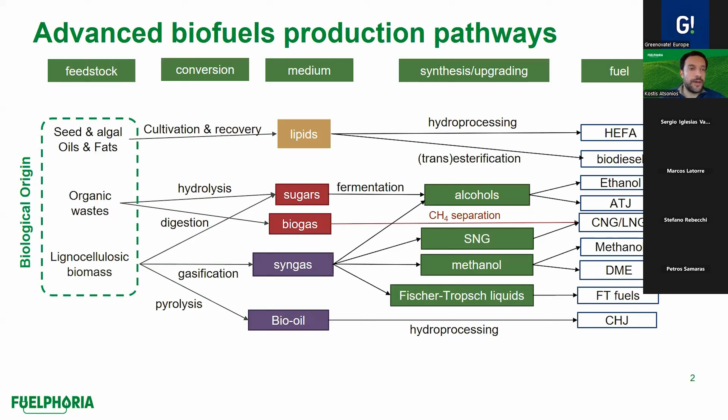So there has been a lot of effort paid towards the optimization of specific steps at the process level, but there is still a lot of effort needed in order to foster this market uptake and to bring these technologies into commercialization.

The most important thing is to examine and demonstrate the overall value chains, not only focusing on explicit process steps. That is the contribution of our project.

Fuelphoria, apart from demonstrating a robust and efficient technological solution for the production of advanced biofuels and renewable fuels of non-biological origin, aims to build a portfolio of sustainable and secure value chains for this production, not focusing on a specific part of the process, but covering entire value chains from feedstock supply to the end use of the produced fuels.

It also aims to promote the exploitation of green fuels, by identifying the barriers that should be overcome in value chains, not only in Europe but also in Africa, to provide new policy recommendations at European level, and to develop new business and marketing concepts in Europe and Africa.

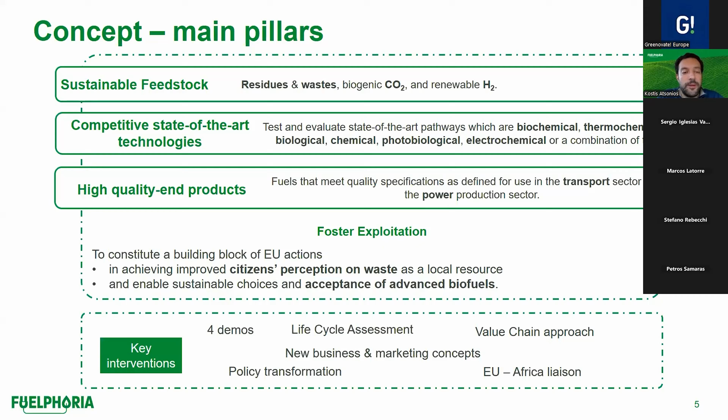And the high quality of the end product, in order to meet the specifications for use in the transport and power sector. All of this is framed under certain exploitation methodologies that aim to constitute a building block of European actions in achieving improved citizens' perception of waste as a local resource, and to enable sustainable choices and acceptance of these renewable fuels.

The heart of this project is the 4 demos. I'm going to give a very brief overview before the more detailed presentations that will follow.

Starting from Demo 1, located in Belgium at the wastewater treatment plant owned by Aquafin in Antwerp. This demo aims at the production of microbial oil, or triglycerides, using as feedstock biogenic CO2 coming from the biogas upgrading unit.

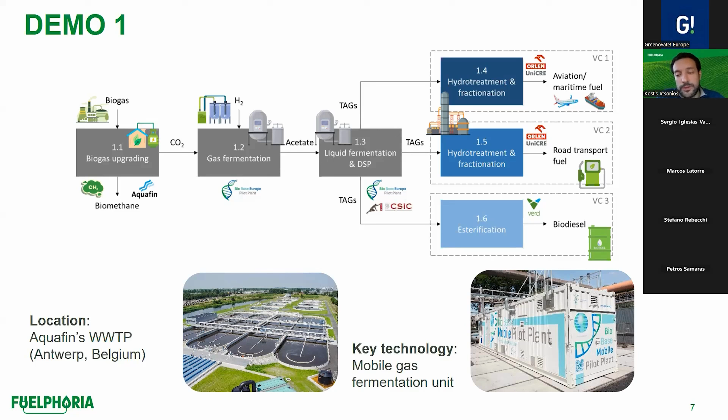CO2 is converted into lipids through a two-stage biological conversion via fermentation. Depending on the linked value chains, these lipids are upgraded into fuels that can be used for the transport sector, like aviation, maritime, road transport for heavy trucks, and biodiesel as well. Among the different technologies, the most important is the mobile gas fermentation unit.

The second demo is located in Spain. Here we also use biogenic CO2, but in this case it comes from a winery, from grape fermentation at Viñas del Vero winery, located in Somontano, Spain, together with green hydrogen coming from water electrolysis.

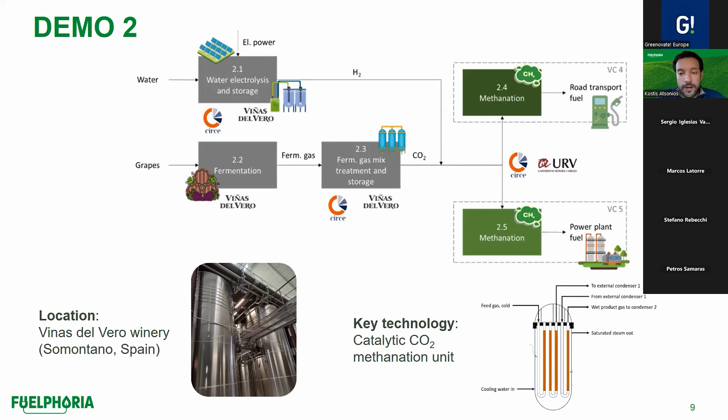CO2 is converted into green methane that can be used either as a road transport fuel or as fuel for electricity generation. Here, the key technology is the novel catalytic methanation unit developed by the demo two partners.

The third demo is located in Greece. Here, the main aim is to produce biodiesel using algal oil that is harvested and extracted using as primary feedstock digestate and CO2 from a biogas plant located in Lagadas, Thessaloniki.

The algal oil produced is converted into biodiesel through esterification, which can be used either as a transport fuel or as fuel at island energy systems.

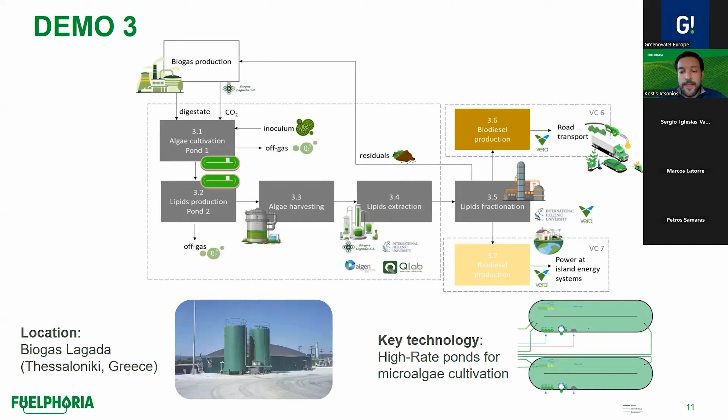The fourth demo is the second one also located in Spain. Here, a zero waste approach is used for the valorization of a great variety of different urban bio-wastes towards the production of bioethanol, using an advanced simultaneous saccharification and fermentation process.

The effluents from this bioethanol production process, both liquid and solid waste streams, are used for the production of biogas and digestate, whereas the CO2 from the fermentation process is hydrogenated towards the production of ethanol and methanol, which have applications in road transport.

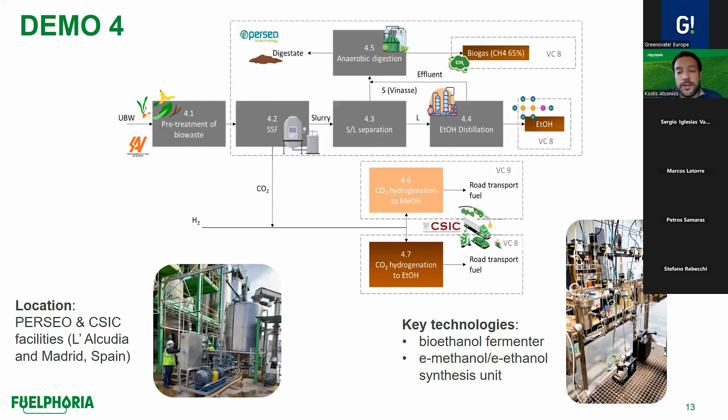Here we have two different sub-demos. The first is located in L'Alcudia, next to Valencia, owned by Perseo, and the second at CSIC facilities in Madrid. The key technologies here are the bioethanol fermenter and the pilot catalytic reactor for synthetic ethanol and methanol production.

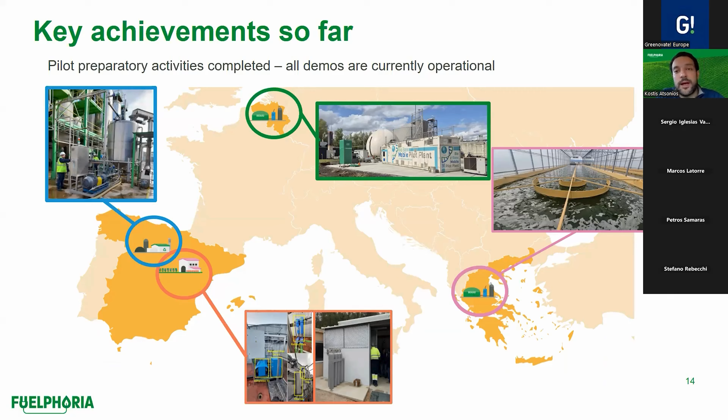Now we are in the first months of the third year of the project. I'm happy to say that all the preparatory activities for these pilots have been completed, and all the demos are currently operational, now producing their first results.

And the other key achievement so far is the optimization of these technologies that are enabled in these 4 demos. Since in Fuelphoria there is a portfolio of different competitive technologies, we have biochemical, biological, thermochemical, photobiological conversion technologies. These have already been optimized and tested at lab scale, and now they are upscaling.

I don't want to talk more. You'll hear more interesting information from the demo leaders at the technical presentations that follow. So that's all from my side.

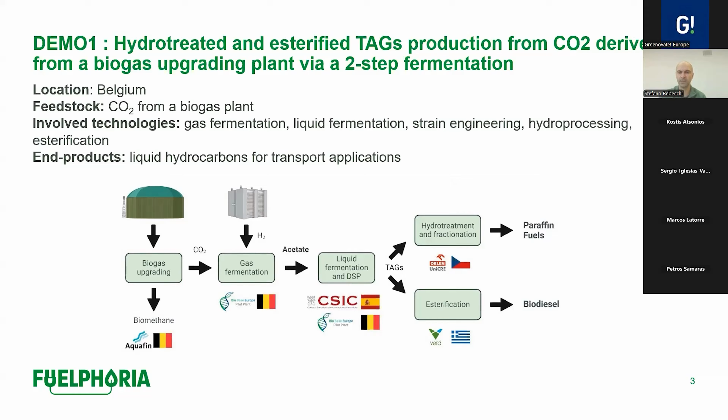Many partners are involved. Among them, we have Aquafin, a wastewater treatment company based in Flanders, Bio Base Europe pilot plant, CSIC, Orlen, UniCRE, and Verd.

So what about the concept of the demo? The demo is divided into different steps, and the main categories are the biological processes and catalytic processes. Initially, the biogas is sent to a biogas upgrading plant where biomethane and CO2 are separated. The first main step of the demo is the gas fermentation process where the biogenic CO2 is converted into acetate. The second biological step is the conversion of the bioacetate into TAGs, microbial oils - this is the liquid fermentation.

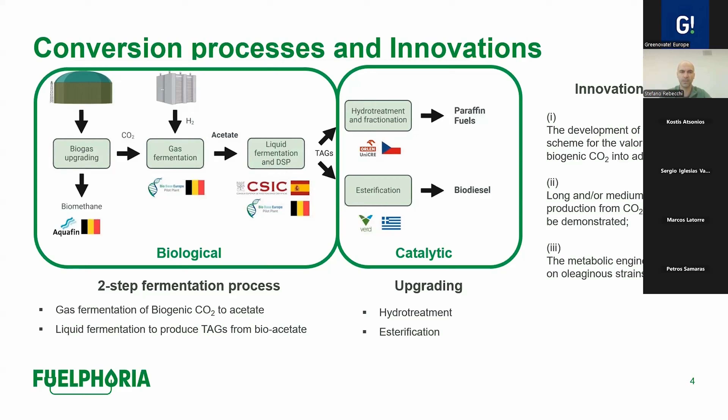Then the TAGs, the microbial oils, are converted into paraffin fuels or biodiesel via a catalytic way. The main innovations of the demo are the development of an integrated scheme for the valorisation of biogenic CO2 into biofuels, and the production of medium and long chain TAGs from biogenic CO2. There are also metabolic engineering strategies for the microorganism needed for the production of the TAGs. We have already passed the second year of the project, and we have already achieved many results for the optimization of the different steps.

In this slide and the next few slides, I will show the main results of the lab scale optimization, starting with the optimization of the gas substrate fermentation process. The objective was to use a wild type anaerobic acetogenic bacteria and develop a continuous fermentation process at lab scale, and to maximize the productivity and concentration of acetic acid.

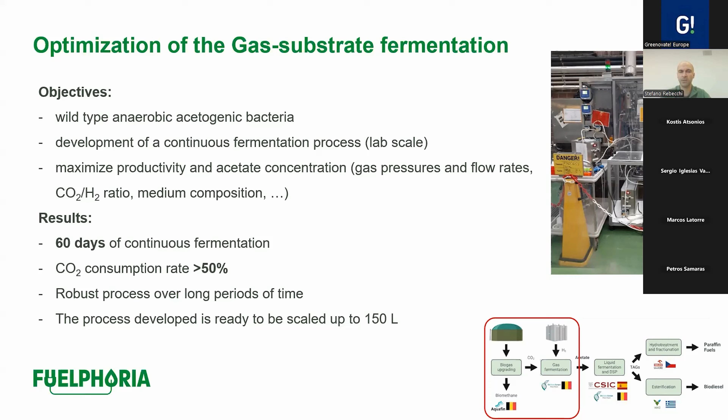The main results: we were able to ferment continuously for more than 60 days, and we reached a consumption of CO2 higher than 50%. So the process is actually robust also for a long period, and we are ready - and actually already doing it, I will show you later - for the scale-up of the process at 150 liter scale and in real industrial conditions.

For the development of the oleaginous strain for TAG production, the partner involved is CSIC CIB, and the main objectives of this task were to use lipid strains like bacteria, Rhodococcus, and yeast - modifying those microorganisms genetically in order to improve the production of lipids by increasing the transport and flux of carbon from acetate to TAGs.

CSIC already worked on both microorganisms, and in particular they were able to produce 3 Yarrowia strains, noticing an increased consumption of acetate and production of TAGs. They also worked on the genetic modification of Rhodococcus jostii, and particularly already tested different acetate concentrations in fed batch mode at small scale.

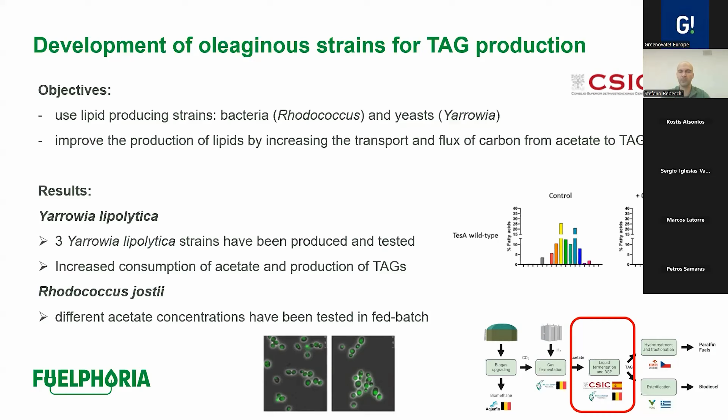Now we move to the next step: optimization of the fermentation process for the production of microbial oils. This task is led by Bio Base Europe pilot plant. The main objective was to use an optimized strain from the previous step for the production of TAGs, maximize titer and productivity by fine-tuning fermentation parameters, and optimize the recovery and purification of the microbial oil from the fermentation broth.

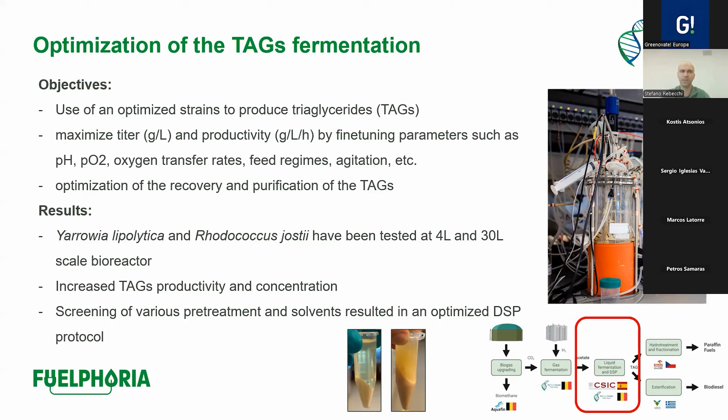We already tested both microorganisms, Yarrowia and Rhodococcus, at different scales, 4 liter and 30 liter bioreactor scale, and noticed increased oil productivity and concentration. We also screened different pretreatment methods and solvents for recovery of the microbial oil, and optimized our DSP protocol. So for the TAGs, we are already ready for the scale-up during the next 2 years.

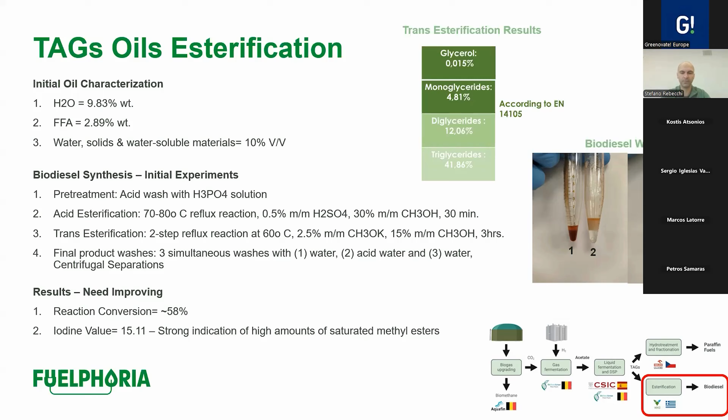We already sent some of the microbial oil to the partner involved in the esterification of the TAGs. I won't go deeply into this slide, but these are the main results at lab scale on a small amount of microbial oil. The partner reached a reaction conversion of approximately 58%. A lot of effort still has to be put into upgrading the oils.

Now I will move to the upscale and challenges we are facing for the scale-up of the demo at a bigger scale. I want to give a quick overview of what we will do, which is the scale-up of each step of the demo.

First, I'll start with the scale-up of the gas fermentation part. We will scale it up to 150 liter scale using real biogenic CO2. Then for the production of microbial oils, we will scale up to a bigger scale, aiming to produce hundreds of kilograms of microbial oil. And the hydroprocessing and esterification of the TAGs for biofuel production will also be scaled up.

So I will start with the scale-up of the gas fermentation unit. This is the general concept. What we already did, and I'll show in the next slide, is first connect the biogas plant and the upgrading plant with our mobile gas fermentation unit.

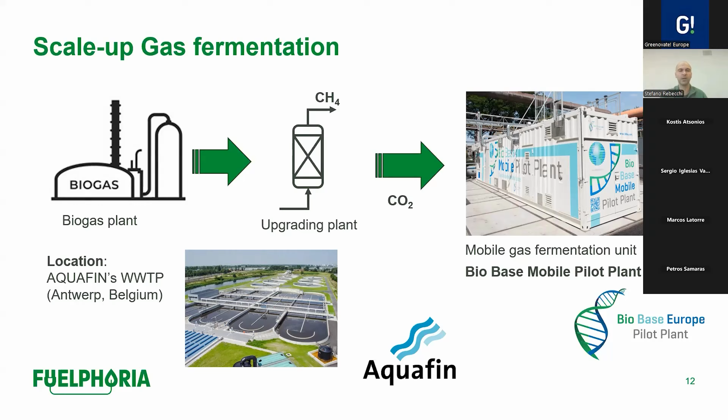The location is a partner of the project, Aquafin, a wastewater treatment company, and at one of their sites they have a biogas plant. The aim was to connect the gas fermentation plant to the upgrading plant.

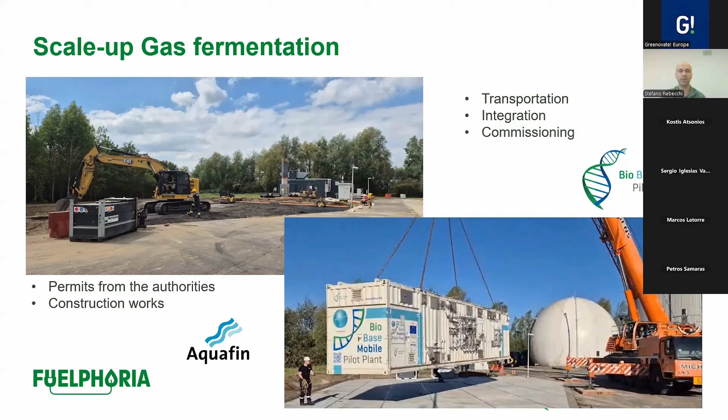This happened a couple of months ago, end of September this year. We faced a lot of challenges, for example permits from authorities, construction works, transportation, and integration and commissioning of our system at the Aquafin site. We were able to finish the commissioning last October this year, and as you can see from this picture, the biogas plant, the upgrading plant, and the mobile gas fermentation unit are now connected.

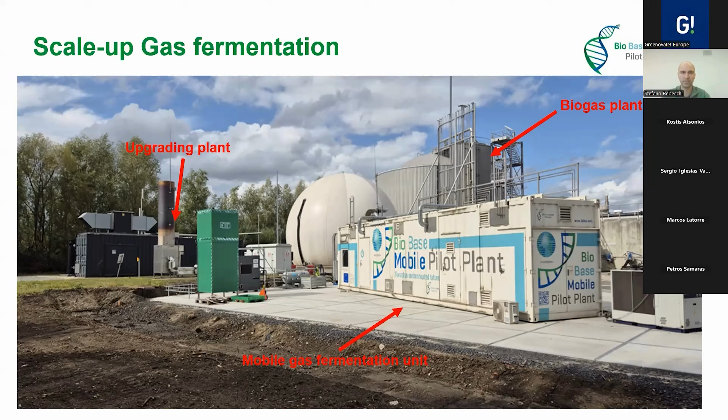We are currently running the first tests using the real biogenic CO2 coming from the biogas upgrading plant. I don't have data to show now because the process is currently ongoing, but we have some promising results.

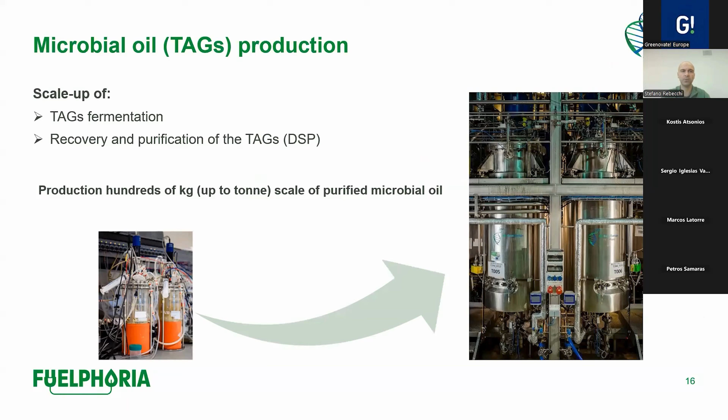Now I'll move quickly to future activities, because next year we will scale up microbial oil production. We will scale up the TAG fermentation to 15 cube scale, and also scale up the recovery and purification DSP. The last step is the upgrading of the microbial oil for production of biofuels, which will be done in two ways: hydrotreatment and esterification.

Hydrotreatment will be done by our partner Orlen Unicre, and esterification by our Greek partner Verd. There are many challenges, for example selection of the catalyst, and seeing if commercial catalysts are suitable for the oil produced in Fuelphoria in this demo. For esterification there are also challenges and a lot to improve, like the conversion. This process will be scaled up to 250 liter scale.

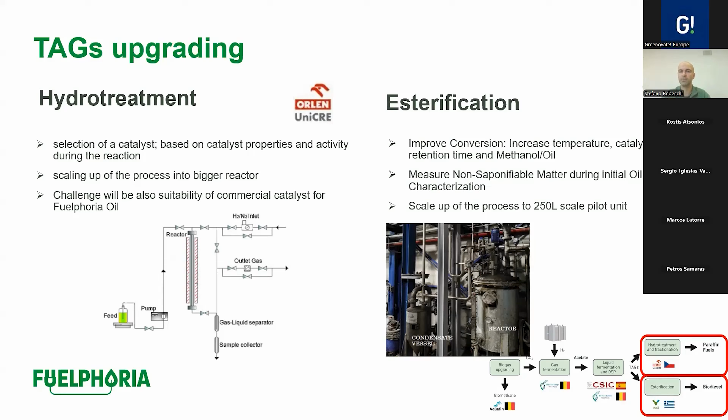Thank you very much. This is all from my side.

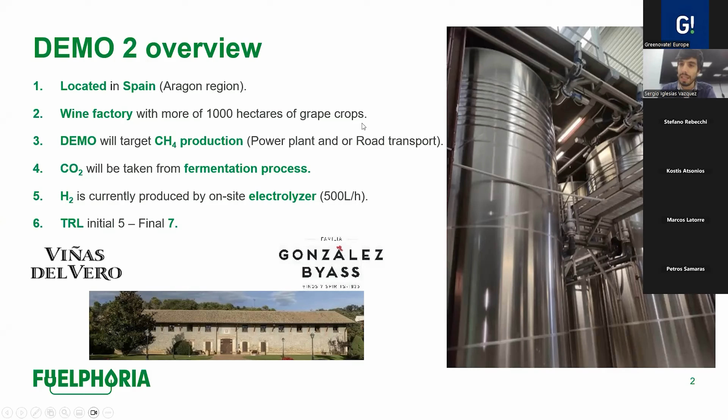Demo 2 is located at Viñas del Vero, Spain, a wine factory with more than 1,000 hectares of grape crops. The demo will target methane production, with CO2 taken from the fermentation process of the wine procedure. Hydrogen is currently produced by an on-site electrolyzer with a capacity of 500 liters per hour. The initial TRL of the project is 5, with a final scope of 7.

The aim of Demo 2 is to utilize the captured CO2 from wine fermentation combined with green hydrogen as feedstock for a methanation process via the Sabatier reaction. This is achieved using a novel nickel-based catalyst, and the CO2 will be separated, purified from the fermentation gas, and stored for later use, where it will be converted into methane. The CO2 generated during wine fermentation is carbon neutral, matching the amount absorbed by the vines through photosynthesis.

Here are the project partners involved in Demo 2. Viñas del Vero is the host site, providing the CO2 and green hydrogen feedstock. Circe is responsible for methanation process development and integration. Finally, the University Rovira i Virgili from Tarragona handles the development of the catalyst and methanation reactor.

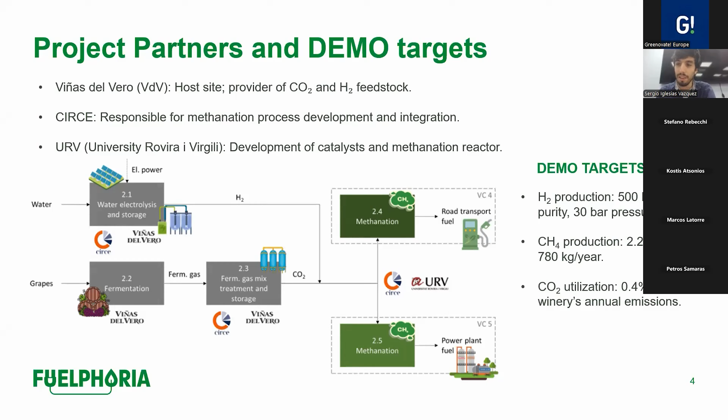The demo targets are hydrogen production of 500 liters per hour, methane production in the reactor of 2.2 kilograms per day, and CO2 utilization of 0.4% of the winery's annual emissions.

This slide shows the CO2 capture, purification, and storage system installed at Viñas del Vero. The unit collects CO2 from the fermentation tanks, compresses it, and purifies it through several filters to remove impurities and humidity. The purified gas is then stored in an 800 kilogram CO2 tank at 20 bars, ready for use or transport to the methanation unit.

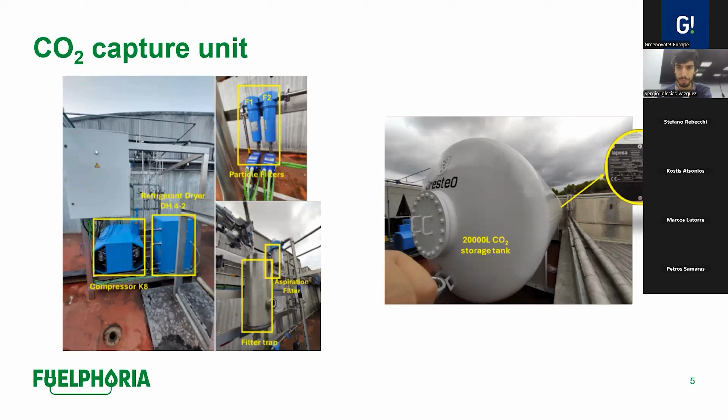The captured CO2 in this harvesting period, from the 20th of August to the 9th of September, has been 17 tons. However, only 800 kilograms will be used for potential methanation, since that is the capacity of the tank. The CO2 has a purity of 99.95%, with only CO, hydrocarbons, ethanol, and water as the main impurities, but these are very low. Sulfur is below the food grade level, so there is no risk of catalyst poisoning.

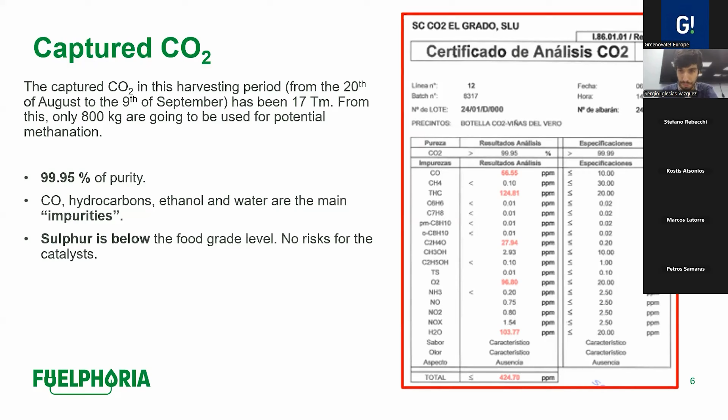Before testing the catalyst in the demonstration reactor, while the unit was still under construction, we carried out a full series of laboratory scale experiments at the University of Rovira i Virgili. These tests allowed us to compare several catalyst formulations under controlled conditions and identify the one offering the best stability, activity, and resistance to deactivation.

We synthesized a nickel-based catalyst, as well as several promoted versions adding 3 different promoters to improve resistance to sintering and coking, named NiProm1, NiProm2, and NiProm3 — these names are for confidentiality. All tests were performed at atmospheric pressure with a hydrogen to CO2 ratio of 4 and a space velocity of 0.54 mole of CO2 per gram of catalyst per hour. These conditions are representative of the expected operation at the demo unit.

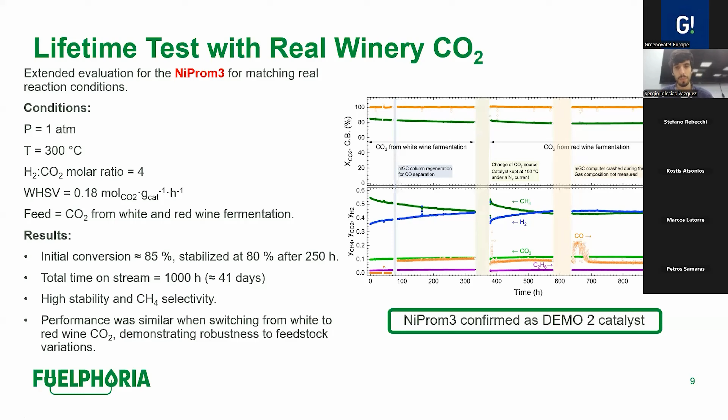The method for catalyst synthesis performed in the lab produces a very fine powder, below 1 millimeter, and this size is not suitable for a demo-size fixed bed reactor. So two routes to adapt the catalyst for the demo unit were investigated: the first is impregnation of the nickel and promoters onto commercial particles, and the second is cold pressing of the precursor powder to obtain large cylindrical pellets.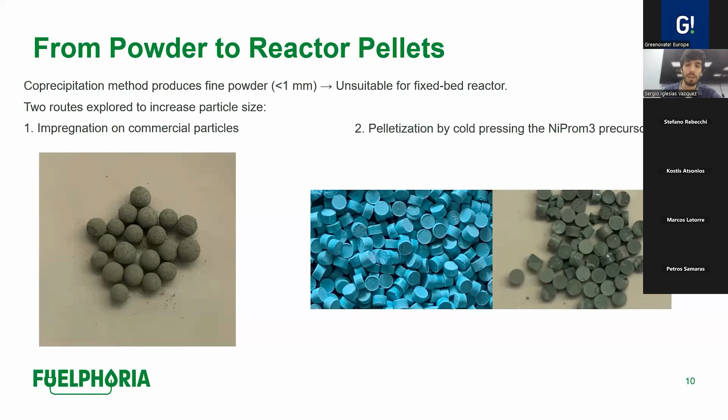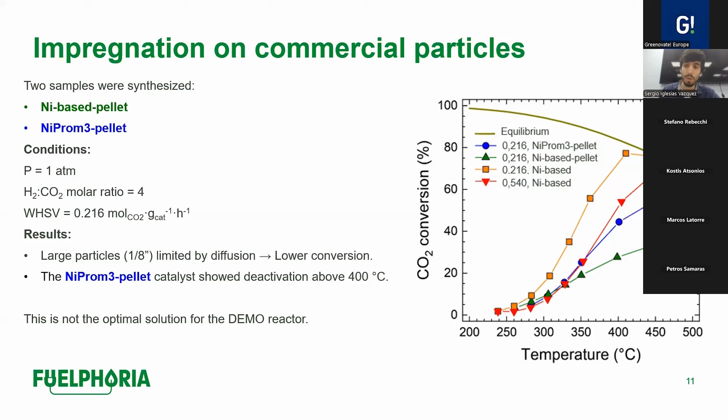Here I show the results from the impregnated catalyst. Two samples were prepared, one standard nickel-based formulation and the other with the promoter we already used. The impregnated pellets were large, about one-eighth inch, and as expected, some diffusion limitations affected the CO2 conversion. The promoted version was more active, but still had less conversion than the powder catalyst. So although this method works, it's not the optimal solution for the demo reactor.

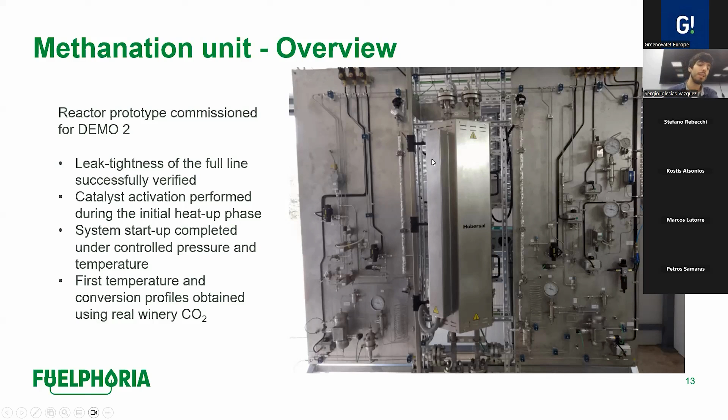During the first startup, we carried out the catalyst activation procedure and ensured that the system reached the temperature needed. At the same time, we performed leak tests across the entire installation to verify the integrity under pressure. We also performed initial catalytic tests and collected the first conversion data using real CO2 from the winery.

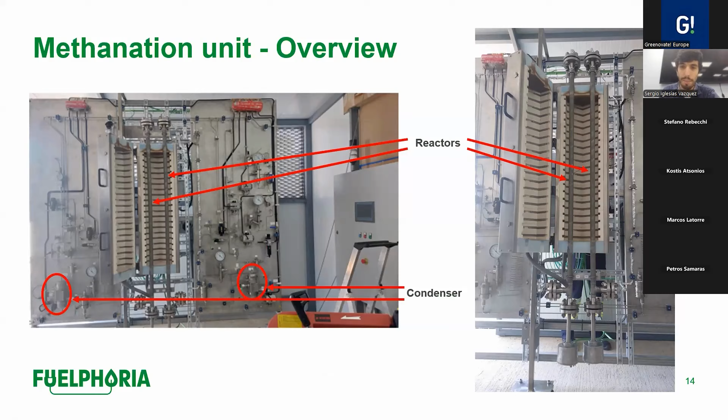Here's an overview of the whole pilot plant, where you can see both reactors in the same furnace, as well as the 2 condensers below, which separate the water produced by the Sabatier reaction, as already said. All the variables in the reactor are controlled from the PLC.

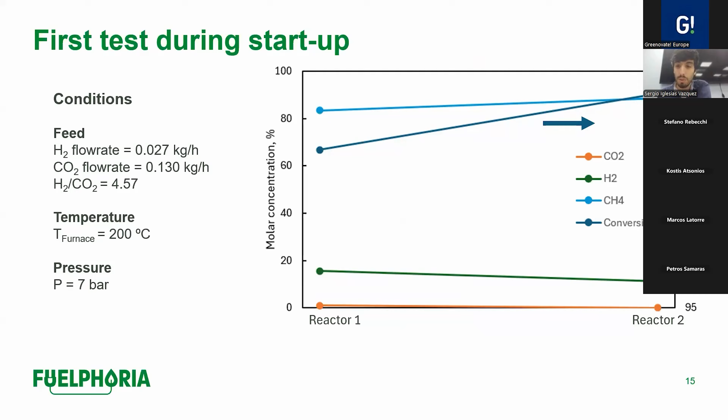This slide presents the gas composition analysis performed for the two methanation reactors tested during the first day of startup, because we don't have more results so far. Using the conditions shown on screen, with a bit of hydrogen excess with respect to stoichiometry, at a molar ratio of 4.57, in the first reactor, the gas barely contains CO2, and the methane concentration is already quite high at 83%, showing that the methanation is happening almost entirely in the first reactor. In the second reactor, the conversion continues, and all the CO2 is almost completely consumed, leading to a higher methane content of 89%. This confirms that the second stage completes the methanation process.

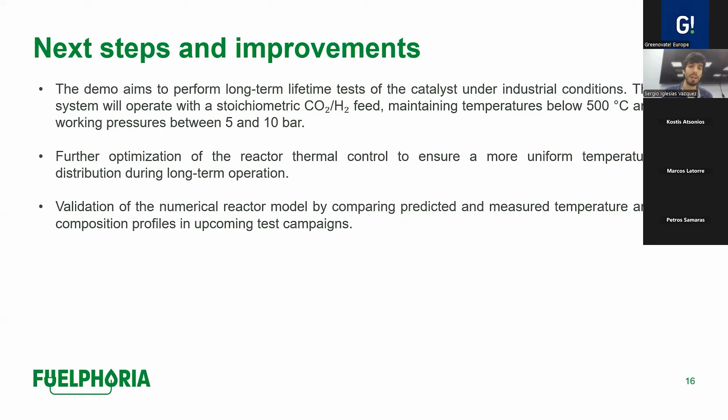In the following phase of next steps and improvements, we will run long duration tests under industrial conditions to confirm the catalyst stability and the reactor performance. We will operate with a stoichiometric CO2 hydrogen feed, maintaining temperatures below 500 degrees and working pressures between 5 and 10 bars. We will also work on improving the thermal control to achieve a more uniform temperature profile during continuous operation. Finally, the new data we generate will be used to validate and refine the numerical reactor modeling developed during the design phase.

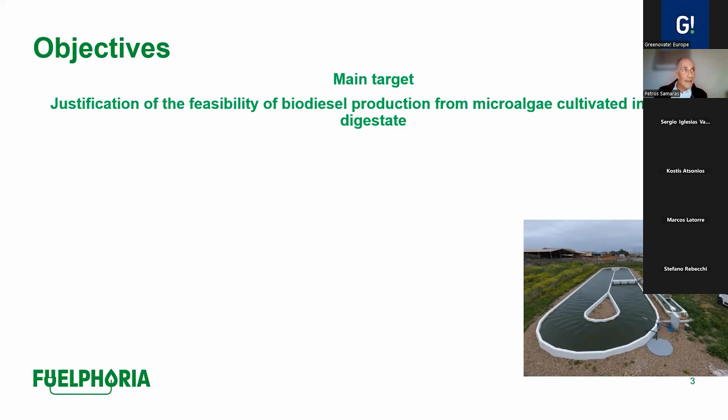So what we would like to do here is use wastewater coming from anaerobic digestion, something we'll see in the next slides, and valorize the nutrients contained in this digestate for cultivation of microalgae. The microalgae will then be used for extraction of lipids and finally production of biodiesel. This has to be justified at large scale, with cost efficiency as the main target of this process.

There are several tasks here: the optimization performed initially at lab scale and then transferred to the demo scale, the full scale plant; the design, construction, and operation of the demo, which is the main target of our efforts; the development of a control system for optimized operation of our system; the harvesting and extraction of lipids from biomass; and finally the production of biodiesel from the received lipids.

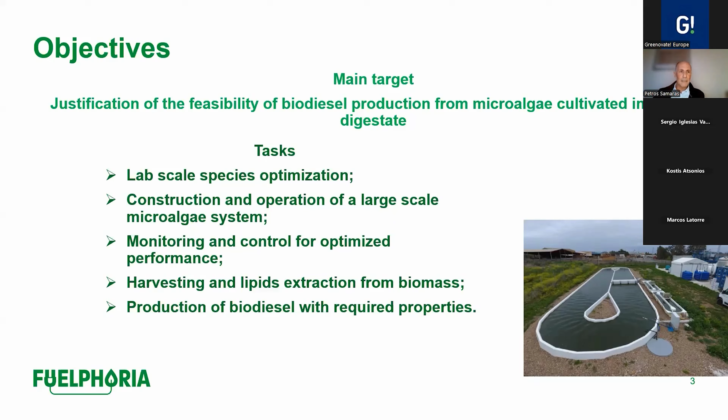Now let's see the main process line of what we would like to develop. We start from a biogas plant's byproducts, and use these products in algae ponds, then different processes follow for post-treatment and production of lipids, and finally biodiesel.

The main action will take place in... here we are. The main plant is an anaerobic digestion plant in Lagada, close to Thessaloniki in Greece. The partners involved include the owner of the biogas unit, Biogas Lagada, and also QLab, International University, and Algen, involved in this first process where we receive the digestate from anaerobic digestion, and also carbon dioxide as a medium to enhance the cultivation of microalgae.

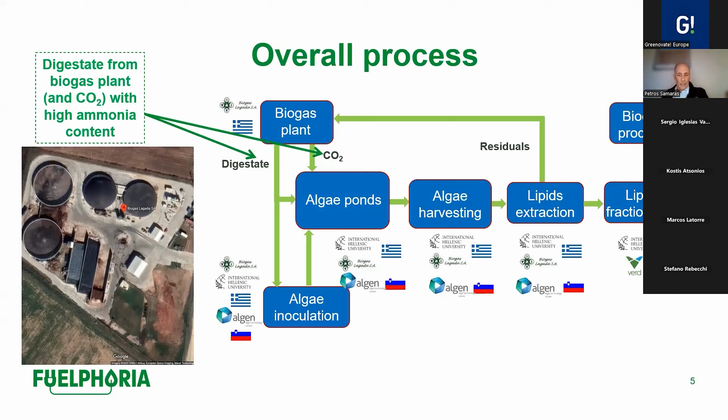So this was also our effort. We would like to have an alternative solution for, on one hand, environmentally friendly management of digestate, and on the other hand, recovery of the nutrients that this digestate may contain. Carbon dioxide is also another issue, and here we would like to support efforts to reduce the carbon footprint from the biogas plants.

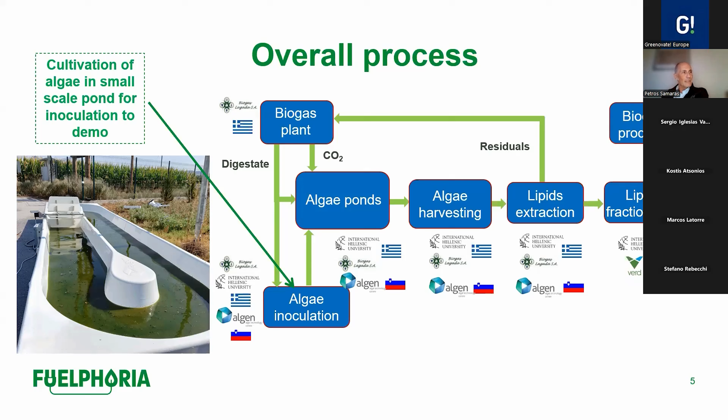These digestate products will be used as a substrate, a nutrient feed for inoculation of microalgae. We cannot go directly to the large pond; we first have to prepare a condensed microalgae culture, which then will be transferred to the large scale pond.

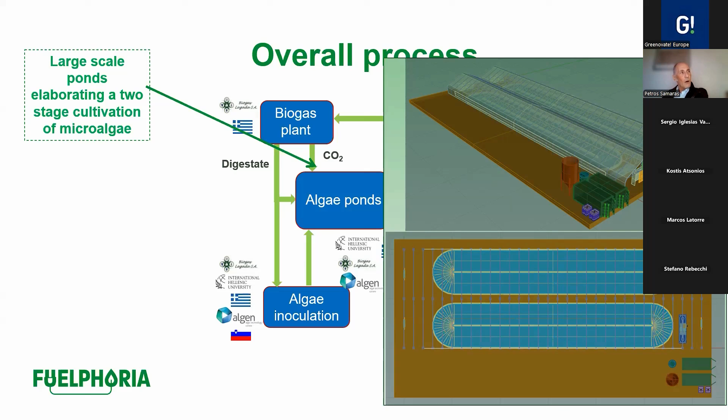We have to construct two ponds that will work in series operation in a two-stage cultivation period. In the first stage and first pond, we would like to have high growth of biomass. Then in the second stage, in the second pond, we make a kind of starvation period in order to have a low nitrogen diet for our microalgae, to turn their metabolism and assimilation behavior from protein formation to lipid formation.

In that case, we receive a lipid-rich biomass. In the next process, algae harvesting will take place using different processing, mainly sedimentation, and then extraction of lipids from microalgae.

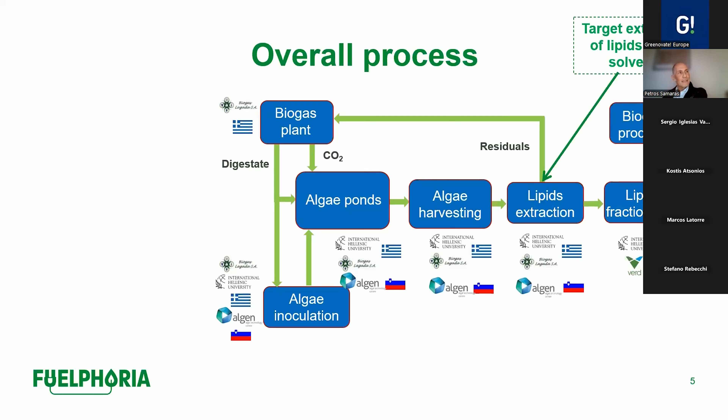All these processes will take place through the collaboration of different partners from Slovenia, Algen, and from Greece, BioLab, QLab, the International University, and CERTH ITI, which also support our actions in modeling and simulation of our process.

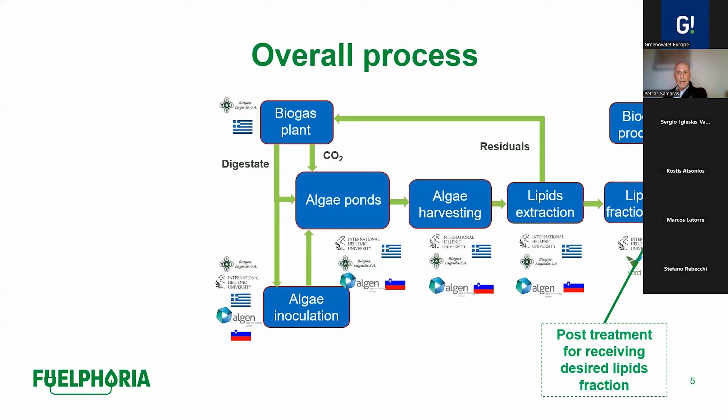Finally, fractionation of the received lipids in order to deliver only the lipids desired for biodiesel production, and the characterization of lipids and biodiesel will take place by Vert, our biodiesel producer colleague in Greece.

So we will go quite fast through the activities that took place during this period. First of all, we started to work with the digestate. We wanted to have very good knowledge of its physical-chemical properties, and also the fluctuation of these properties over time. This would provide us a good concept of what could be the feedstock for our microalgae in the inoculation and also in the large-scale ponds.

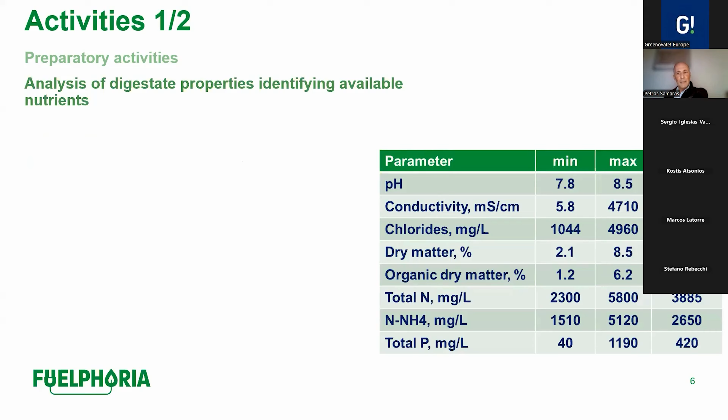In the second action of this period, we had to go through different species. You can see here the properties of digestate, where nitrogen went up to 6 grams per liter sometimes, and mostly this nitrogen was ammonia nitrogen, which is very good for our microalgae cultivation.

Then we had to find optimum species that can grow in digestate. The task here was not only to find species that can survive in this harsh environment, but also species that can provide high lipid content, along with the conditions that we would like to cultivate them in.

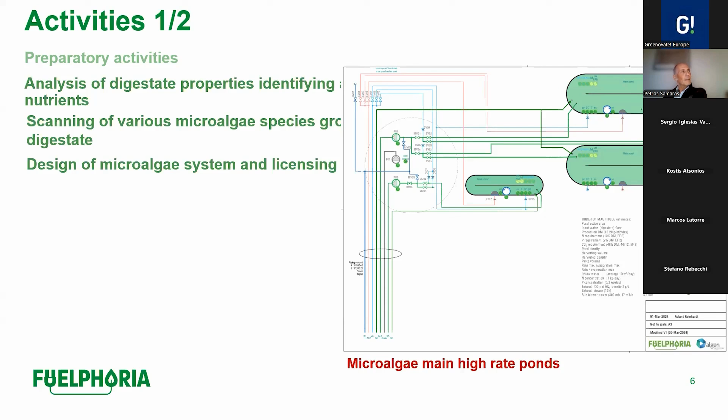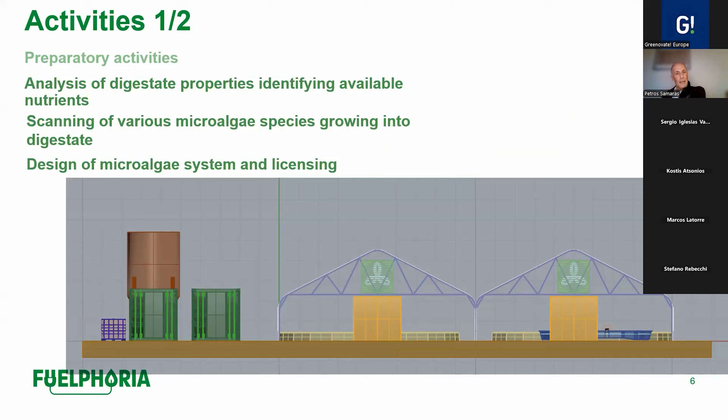The most interesting thing, something we didn't foresee from the beginning, was that we also had to construct a greenhouse in order to enclose our ponds and protect our microalgae from intense environmental conditions or even external contamination.

And then the preparation of biodiesel units, and these take place by VERT, 250 liters biodiesel unit for esterification of lipids from microalgae to biodiesel.

And the model system developed by CERTH-ITI, the technology group, where what we would like to do here is simulate the processes taking place in our microalgae ponds by some kind of training, training our model on the system operation, and finally being able to predict the response of our system under different environmental conditions.

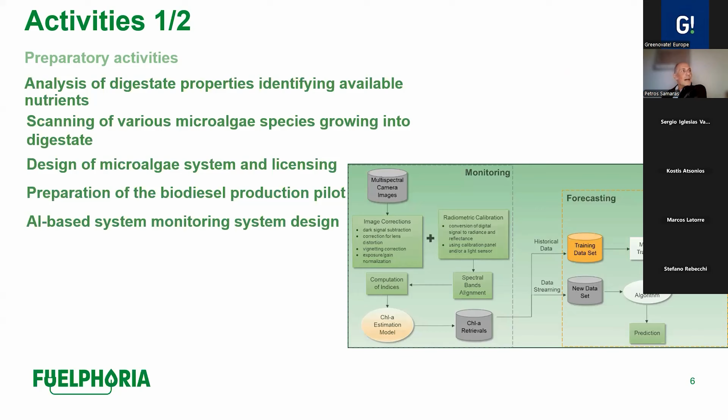And then we went from the lab scale to the large scale, to the semi-pilot scale, where we try to transform the results from the lab in the inoculation ponds, and see which are the best species that can be cultivated in digestate, and also the species that can provide lipids with high content—not all kinds of lipids, but only the lipids desired for production of biodiesel. And this can be done by combination of species and conditions.

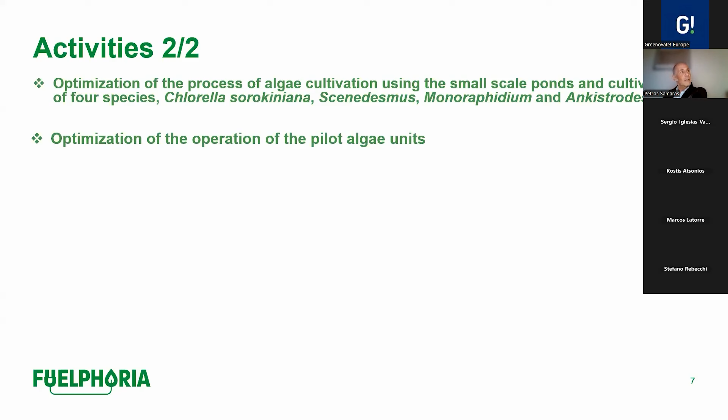In the next phase, we started also the operation of the large-scale ponds. The operation started in October, so we have some first results. We are trying now to establish the best conditions, the optimum conditions for performance.

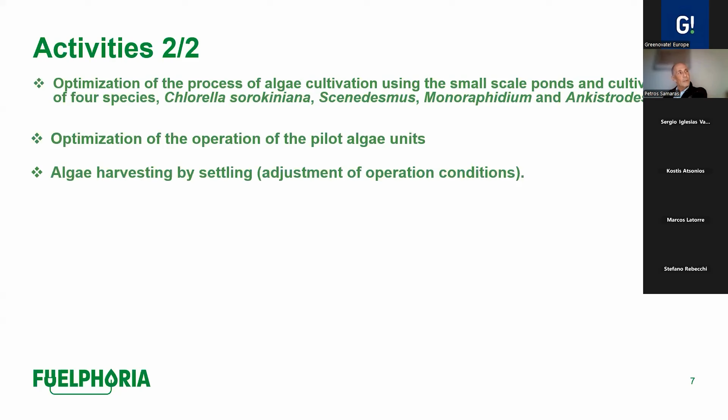Following the algae harvesting, we are using also a specific operation protocol in order to have the easy settling of microalgae in settling tanks, in order to get this concentrating of cells, the concentrated biomass, and this biomass then will be used for extraction by different solvents.

And this is also a challenging issue here, since hexane is the most often used solvent for lipids extraction from microalgae, but it faces several problems like the recovery of hexane, the cost, or the flammability of the system, and so on. Something that we have to take care of if we would like to go on a large-scale process.

And what we tried here to develop and use in lipids extraction was different solvents of switchable polarity. So we have now an amine that can change the polarity depending on the pH of the solution, from hydrophobic to hydrophilic. So when it is in the hydrophobic state, it can extract the lipids from microalgae, and in the following state, when it turns hydrophilic, it can become separated from lipids.

So we can recover the solvents and reuse them in a subsequent cycle, while the lipids can be used for biodiesel production. What we tried to do here was to optimize the conditions for turning the polarity of the system, and use carbon dioxide in order to reduce the pH of the system.

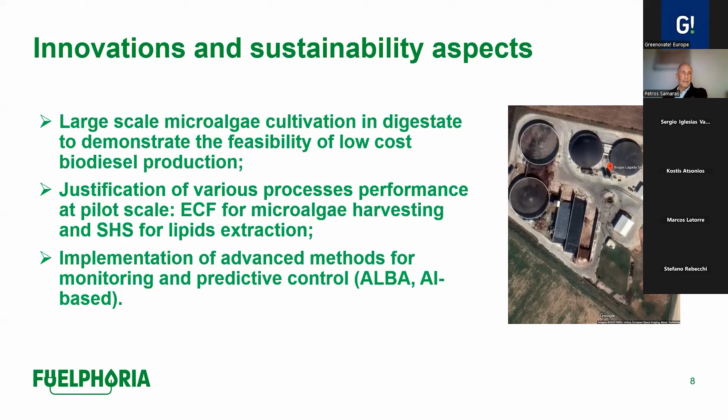And here, what we can see in the literature is that there are a huge number of reports on switchable solvents, but all of them are dealing with very small volumes, some mLs, and this was also something that we had to deal with. And finally, the implementation of some advanced AI methods in order to have this response prediction capacity of our system.

The challenges that we have to address—there are several challenges when we are upscaling to full-scale plants. First of all, when we are dealing with microalgae, we have to take care of potential contamination, or at the same time we have conditions where predators can grow, and then we might have a collapse of our cultivation.

Environmental conditions—when we started the large-scale experiments in early October, the weather was quite good and microalgae were very happy to grow in the ponds. But now with the temperature dropping and cloudy weather, it's not so comfortable for them, so we have to deal with that too.

Or even the changes in digestate properties, and this depends upon the feedstock. The biogas plant cares about the production of biogas and delivery of electricity, so in that case they use whatever feedstock they can find. And feedstock may change from livestock production to dairies or to food industries, or even to some expired products, and chicken manure.

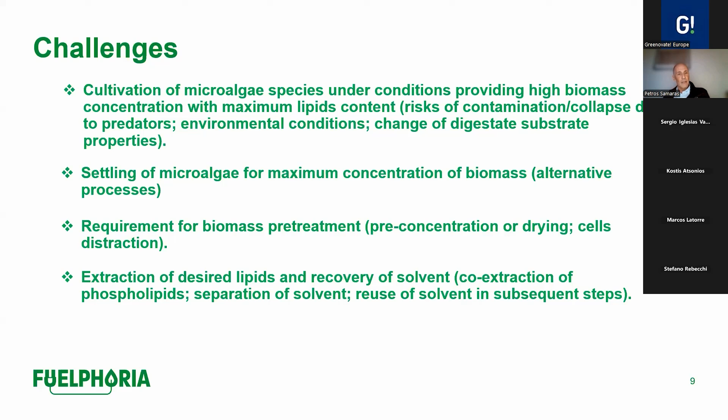The extraction is the most challenging process, I would say, because here we have not only to consider the desired lipids of high recovery and high purity, but also the recovery of solvent of high purity that can be recycled and will not be lost in the water phase. And the overall process optimization in order to justify the cost performance of our system.

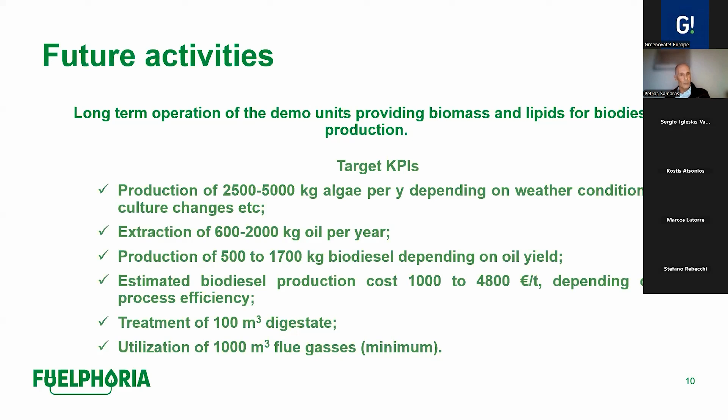So in the future we are going to continue working with a large-scale system, and we are trying to catch the performance indicators that we have set in the application form. You can see here 2.5 up to 5 tons of algae per year, and from half a ton up to 2 tons of oil per year, to produce around 1.7 maximum tons of biodiesel.

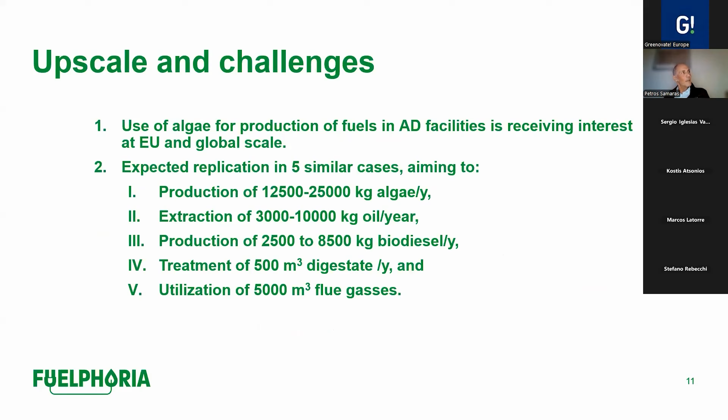Of course, we have in mind to make a replication of our system in other anaerobic digestion facilities, and we are ambitious and optimistic that we can make this replication to 5 different similar cases in order to expand the potential of our process.

So that was shortly the demo that we are developing here in Greece, and I see that there are several questions and answers, and I would be happy to address them and answer. Thank you very much.

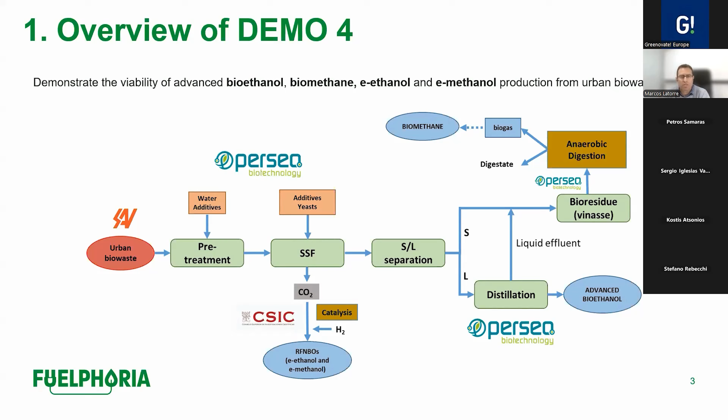3 partners participate in demo 4. SAP is the supplier of the urban biowaste. Perseo deals with the biotechnological valorization of the waste into ethanol and biogas, and CSIC is involved in the catalytic conversion of CO2.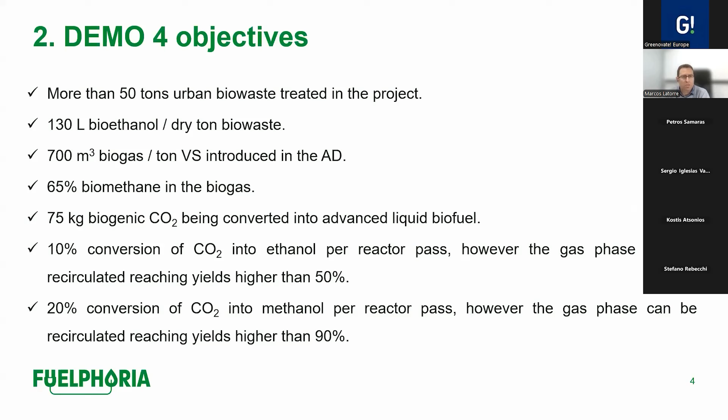So here we can see the KPIs of the demo. We will treat more than 50 tons of urban biowaste during the project. We have a target of 130 liters of ethanol per ton of biowaste, and 700 cubic meters of biogas per ton of volatile solids in the anaerobic digestion, with 65% methane content. We will treat 75 kilograms of biogenic CO2 to be converted into advanced liquid biofuels, with a conversion target of 10% for CO2 into ethanol per reactor pass, and 50% by recirculating, and 20% conversion of CO2 into methanol, with a yield higher than 90% by recirculation.

So demo 4 will practically showcase value chains 8 and 9 of the project, where the viability of the production of advanced ethanol, e-ethanol, and e-methanol from urban biowaste will be demonstrated, and these renewable fuels will be validated for road and maritime transport.

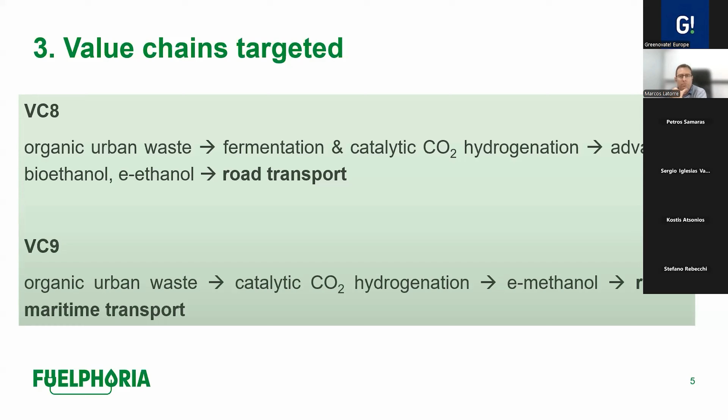SAV, the supplier of the urban biowaste, is a large environmental Spanish company which offers 3 main services: collection and management of solid urban waste, wastewater treatment, and urban services and maintenance of cities.

In these processes, three main biowastes are generated, which were evaluated as feedstocks for demo 4, as we can see here in the pictures.

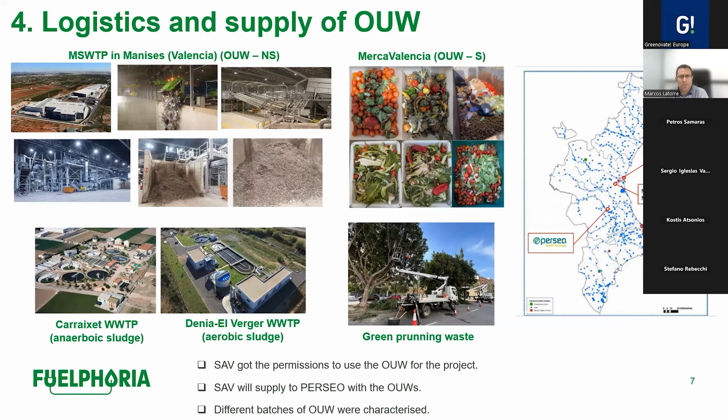Different industrial plants from the Valencia region will supply the urban waste, composed of a mix of separately collected and non-separately collected municipal biowaste, and also sewage sludge from wastewater treatment plants. SAV got the permissions needed to supply all these wastes for the project, and different batches from different periods were chemically characterized to know the composition and potential.

Currently in Valencia city, around 60% of municipal biowaste comes from separate collection and 40% from non-separate collection. By mixing these two biowastes, the composition of the feedstock used in the demo will be as indicated in the table on the left, with around 30% carbohydrates and around 10% fats.

Regarding the sewage sludge, it contained around 2% solids, and no inhibitors were observed for the fermentation, so it could be used as a substitute for water in the ethanol production process.

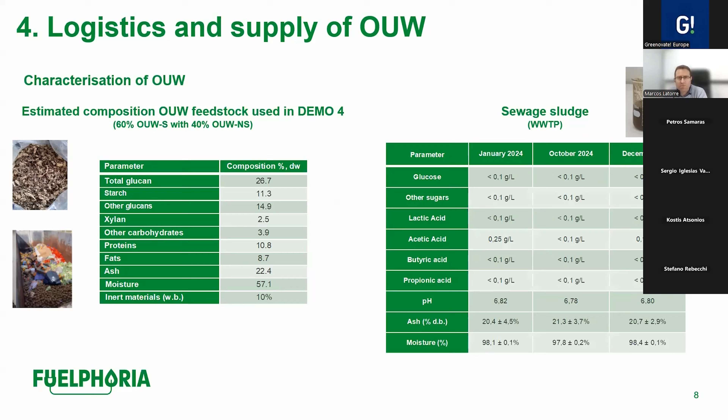Regarding the preparatory activities of the demo plant from Perseo in the bioethanol unit, the enzymatic hydrolysis step was optimized at lab scale, and the fermenting microorganism was selected with a high sugar conversion yield.

The sewage sludge did not generate any inhibitions, so it can replace the necessary water in the process, and the potential of ethanol reached the target we had for the demo.

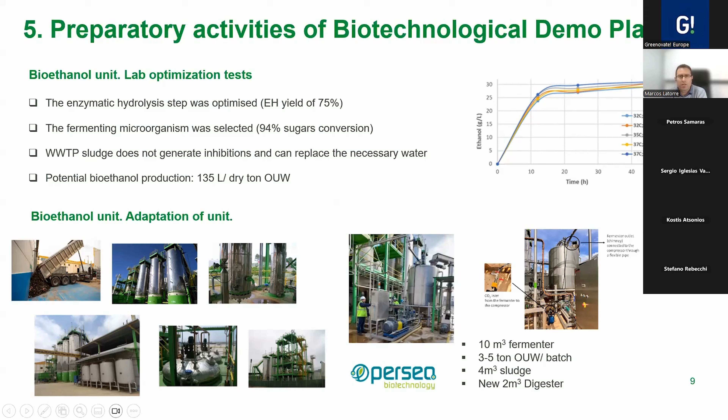The first demo trial consisted of using organic urban waste from non-separate origin mixed with water. As we can see in the plot, the plant trial and the lab control performed similarly, with a good yield of SSF. The main disadvantage of using this biowaste from a non-separate source is that it contains relatively high inert materials and low content of carbohydrates, decreasing the potential of ethanol per ton of feedstock.

So in the next trials, we will use richer streams based on separately collected biowaste as raw materials.

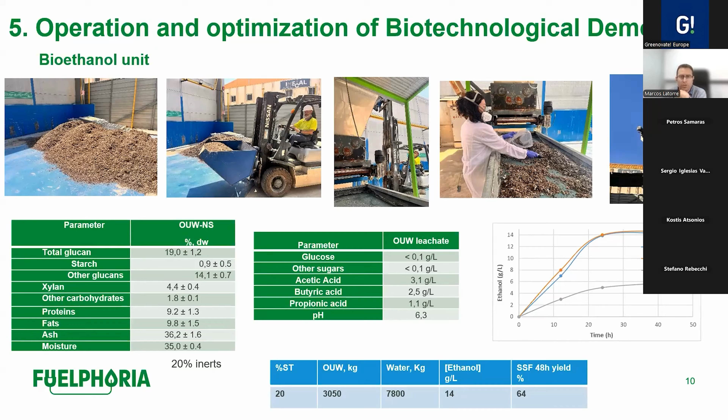We also tried a sample of leachate, a waste from municipal solid waste treatment plants. We used it at larger scale to substitute water, but in this case it inhibited the fermentation, probably due to the presence of different organic acids known to be inhibitors for this bioconversion.

In the biogas unit, we completed lab tests to evaluate the fermentation vinasse and its biomethane potential. The fresh and fermented material were characterized, as well as the anaerobic inoculum. We obtained typical values for this kind of substrate, but with 10% higher production of biomethane in the case of vinasse.

Perseo designed and assembled a new 2 cubic meter digester in the demo plant using different suppliers, and the digester was installed within an ATEX zone with all the required sensors and control system.

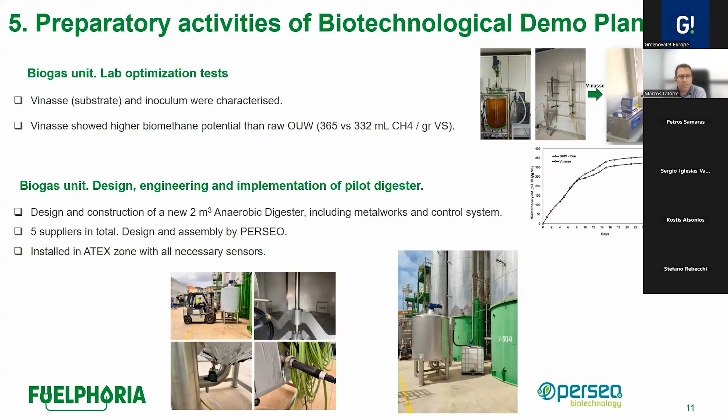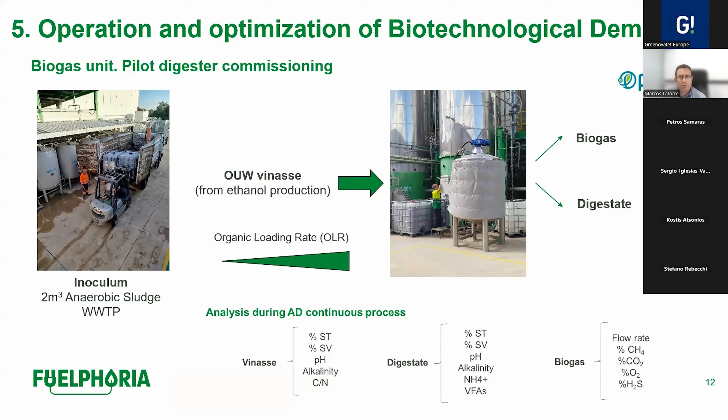The pilot digester was commissioned recently using 2 cubic meters of anaerobic sludge from SAV's wastewater treatment plants, and it will be fed with the vinasse from the ethanol trials. The starting organic loading rate will be increased gradually, and here we will see the evolution of the production of biogas and digestate, and below the parameters that will be monitored continuously during the anaerobic digestion process.

Now we move to the catalytic part of the demo with CO2 hydrogenation into e-methanol. The work at laboratory scale began with tests for methanol synthesis using a commercial copper-based catalyst, with tests made in a fixed bed reactor at 240 degrees and 50 bar, starting from CO2 and hydrogen.

A CO2 conversion of 25% was obtained and remained stable even after 140 hours. Methanol selectivity was up to 43%, and the other main product was carbon monoxide.

Following these results, a copper-based catalyst was developed, leading to a recent publication by CSIC in Catalysis Today. In this work, the influence of different magnesium loadings was tested. Magnesium is a promoter known to increase the basic character of the catalyst, improving its interaction with CO2. The effects of the promoter were observed both in the structural properties and in the catalytic activity.

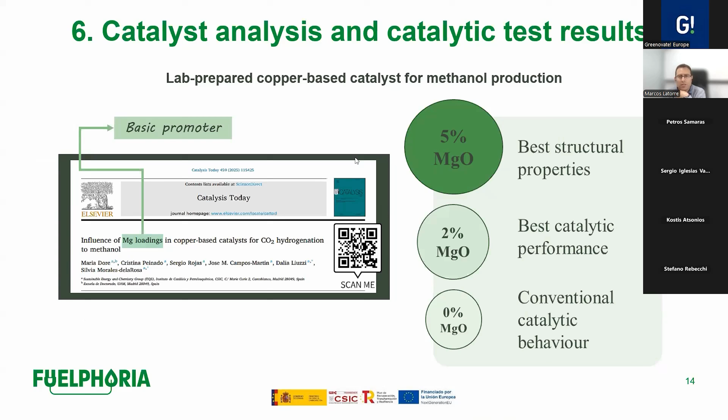It was observed that magnesium improved the structural properties of the catalyst active phase, increasing its dispersion, the number of active sites where the reaction occurs, and also the surface area. All these properties are beneficial for enhancing the interaction between the catalyst and the CO2.

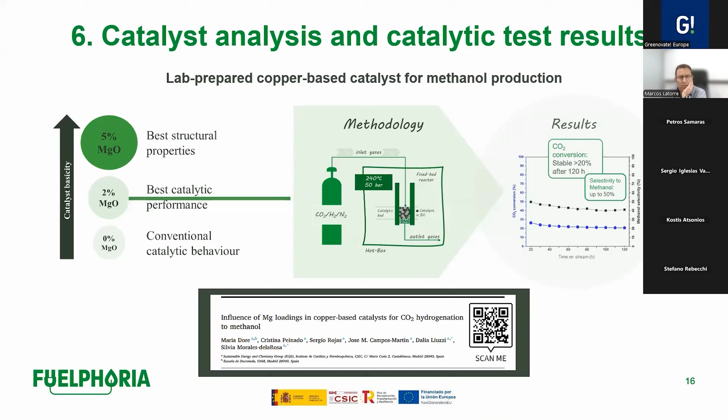However, the best catalytic activity was observed for the catalyst with the intermediate promoter concentration, using the same setup for the lab scale catalytic test. A stable CO2 conversion of 20% was achieved even after 120 hours of reaction, along with methanol selectivity of up to 50%.

The catalytic tests conducted at laboratory scale have the aim of being scaled up to a pilot plant, specifically designed for CO2 conversion with green hydrogen using heterogeneous catalysts. The goal is to achieve 20% CO2 conversion into methanol per reactor pass and up to 90% by recirculation.

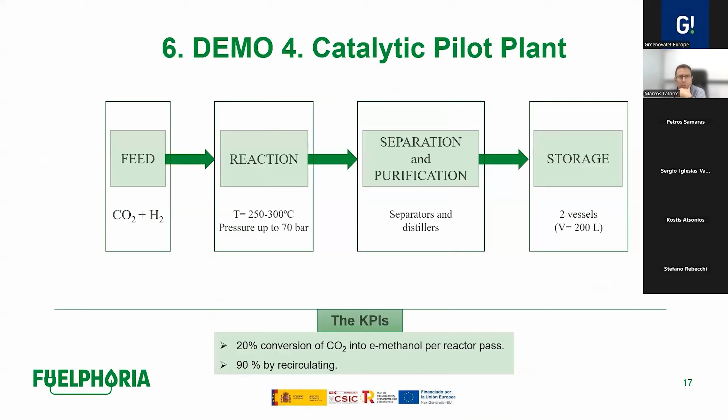Following this idea, the construction of the pilot plant was recently completed, and it reached CSIC facilities. The plant was designed to fit into a container, making it easier to move, and is expected to be commissioned in the coming months.

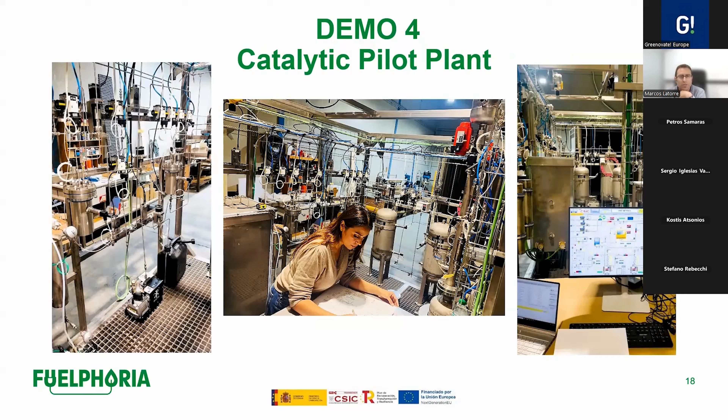As conclusions: in this period of the project, we optimized lab scale production of 2G bioethanol from organic urban waste, and the first demo trial was performed. A pilot digester was commissioned and will operate in continuous for the next months using the vinasse as input.

A catalyst for methanol production from CO2 hydrogenation was developed and is stable over time and with optimal reaction conditions, and it is awaiting pilot scale testing. Also the pilot plant was recently completed and has been sent to the ICP facilities of CSIC.

For the next months, our plan is to complete the optimization for the advanced bioethanol production from urban biowaste at demo scale, also the biogas production, and carry out novel synthesis of a series of catalysts for the conversion of CO2 to ethanol. Also to test the real CO2 stream from the PERSEO fermenter, taking into account possible impurities, and operate the catalytic pilot plant within the facilities of CSIC to optimize e-fuels production from CO2 hydrogenation.

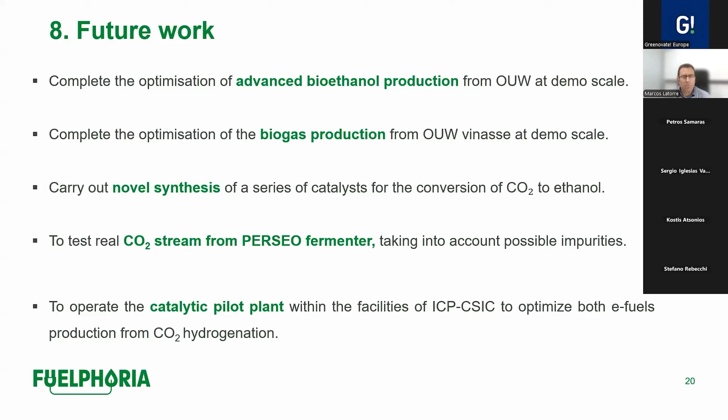And that's all. That's a summary of the work done in Demo 4 in this period. Thank you for your attention, and I'll be happy to answer any questions you may have. Thanks.